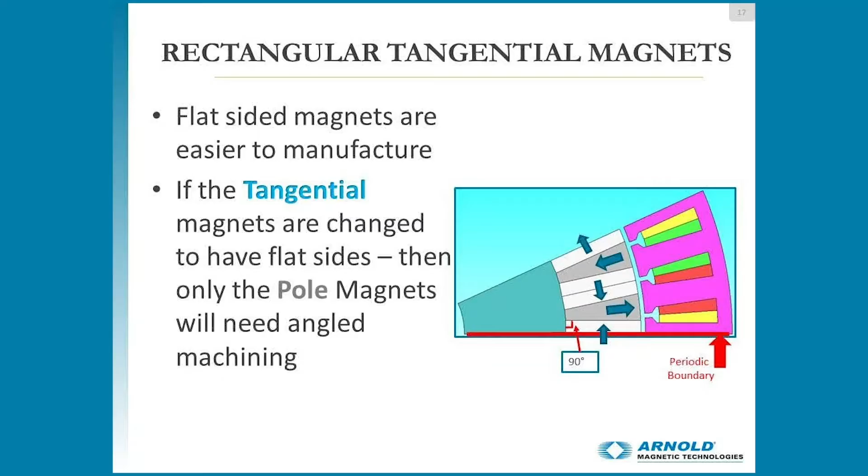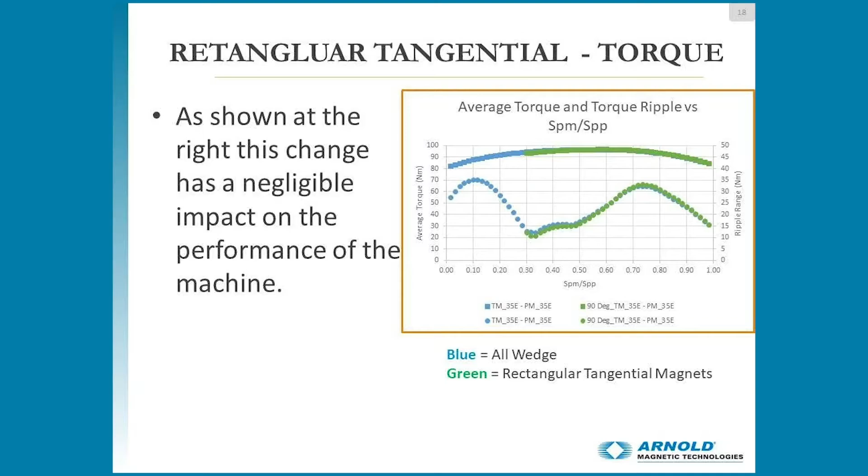Okay, now we're going to look at the results of inserting the rectangle tangential magnets into that topology. So looking at the graph on the right, we can see that the blue torque curve is the all-wedge shape configuration, and the green is the rectangular tangential magnets. So we can see that those lines are really both right on top of each other. So we reduced the manufacturing cost of the rotor slightly by reducing the complexity of the magnets, and we're still getting consistent performance out of that system.

Now let's see if we can take that a step further on this slide. Can I actually use a weaker magnet for my tangential magnets and just leave my very strong magnet for my radial magnets? And we want to take a look at this because the stronger a magnet is, a little bit more expensive that magnet is. So can we use a little bit weaker magnet, a little bit more cost-effective magnet for those tangential pieces?

So for this example, we used a Recoma 30 MGOe samarium cobalt magnet for the tangential pieces, and we stuck with the Recoma 35E, like we have in the previous cases, for those radial pole piece magnets. We left the tangential magnets as rectangles, and we left the pole pieces as the wedges.

So now we're going to plot that torque curve on top of the previous two cases. And when we look at that torque curve, we can see that the blue line, again, is the all-wedge configuration with all the same strength magnet, the Recoma 35E. The green line is the rectangular tangential magnets, still all the same material, but now we've added on this dark blue line. So the dark blue line has rectangular R30 MGOe tangential magnets.

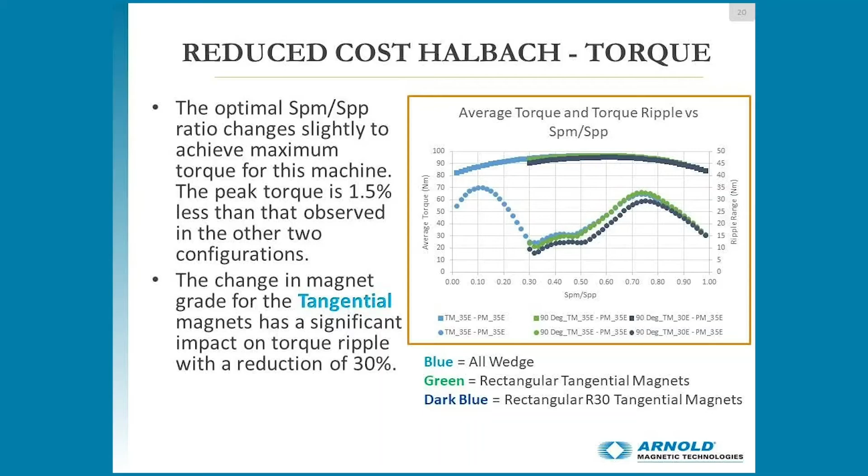So looking at this though, if you look at not just the top curve, which is the torque, but if we look down at the torque ripple, you can see that the torque ripple is actually reduced when we inserted those slightly weaker magnets for the tangential pieces of the Halbach array system. So really good effect overall. Again, the SPM and SPP, the width of the pole piece and the pole pitch, did change slightly because we did weaken that magnet. But overall, we see a really good result, and we just reduced the system cost two ways: the tangential magnet being a rectangle, and also using a slightly weaker, more cost-effective material for those tangential magnets.

Now, what can we do to maybe take one more step? So in this last step, we're going to now take our pole pieces, the Recoma 35E pieces, the strong ones, and since that is a higher grade material, more expensive raw base material, let's try to also make that one the cheaper configuration in terms of the shape of the magnets. We'll make that one the rectangle, and we'll make the tangential magnets the arc pieces.

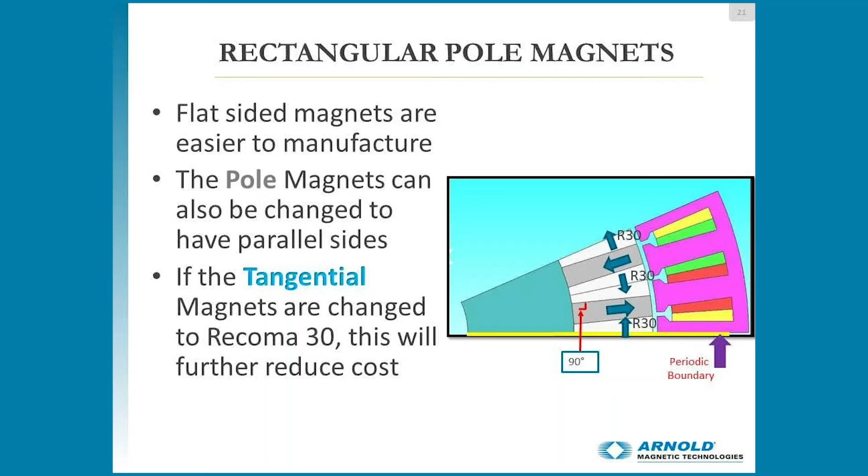Again, because we still want to have a complete fill around the circumference of the rotor with magnet material. Air is not going to help us at all. So we want 100% magnet material between the magnet carrying rotor and the air gap between the rotor and the stator. So the pole magnets can also be changed to have the parallel sides. And if the tangential magnets are changed to Recoma 30, it reduces that cost.

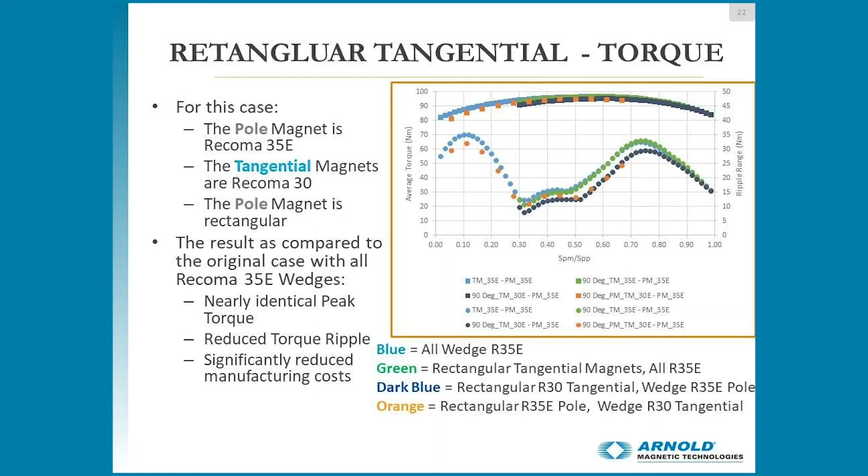So now we'll take a look at the results like we have in our previous study. So again, same graph, we're plotting the torque ripple. And for the cases, now you can see everything plotted on top of each other. So the blue line, again, is all wedge R35E. The green is the rectangular tangential magnets, which is, again, all Recoma 35E. The dark blue is when we switched out those tangential magnets with a 30 MGOe material with the wedge 35E poles. And our newest case is going to be the orange dots, which are a rectangle 35E pole piece, and then now the wedge shapes, my tangential magnets, are the 30E.

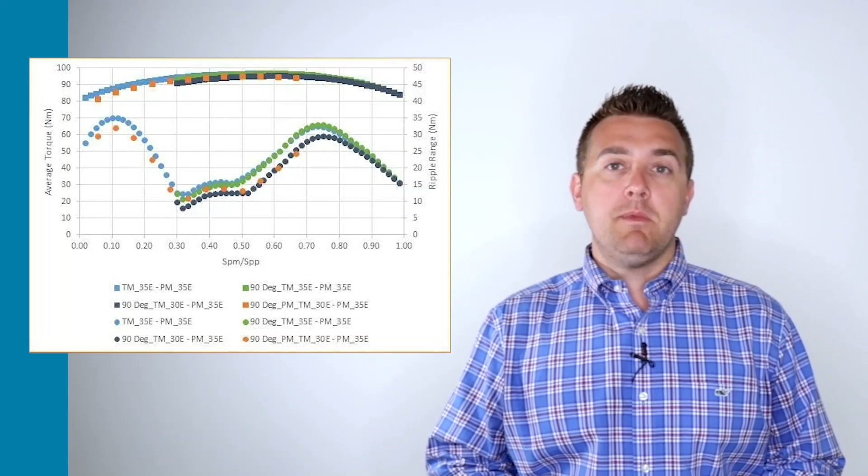So you can see we've done a lot with this system. We're still getting the same performance out of the system overall, but we've made the magnets a little bit more cost effective. We've made them a little bit easier to manufacture, and we're still getting that same overall performance. And we've actually lowered that torque ripple a little bit with this different configuration. So in terms of power density and manufacturability, some really good food for thought when you're working on your surface mount permanent magnet motors in the future and you want more power density and you want to use a Halbach array configuration.